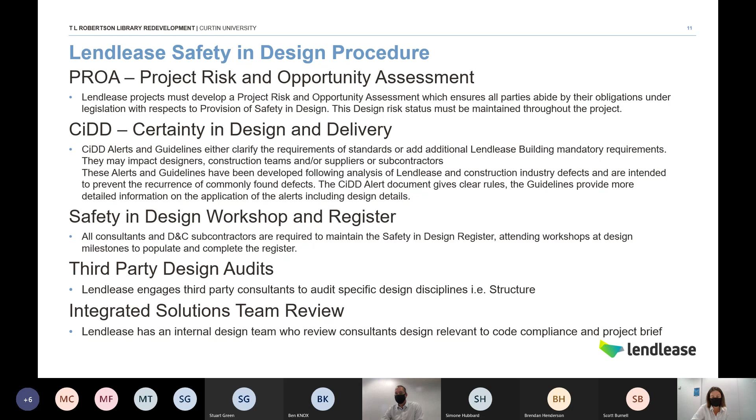So safety in design, going through all of that's obviously what we call our overarching safety in design process, and then there is the specific safety in design register and workshops that we hold.

On this project we did things a little bit differently, and I think that was probably influenced by myself coming from client side and running this on a few different projects. Basically we engaged an external safety in design consultant, called OH&S Solutions out of Sydney. They were engaged to conduct a review of the drawings, a review of the existing register that had been handed over from Curtin when we took over the project, and run a workshop and facilitate a workshop with that information, then populate an additional safety in design register.

I suppose people say that is essentially my role, but why did we engage an external consultant? In my history of working in safety in design, I think it's a shame - a lot of consultants just see it as a box ticking exercise. It's something they're engaged to do, something they're required by code to do.

But it becomes one of those laborious tasks where you probably flick it to the grad in the office, and they're filling out working at heights, making sure services aren't near open spaces, confined spaces, things like that. It becomes very generic and very repetitive from previous projects.

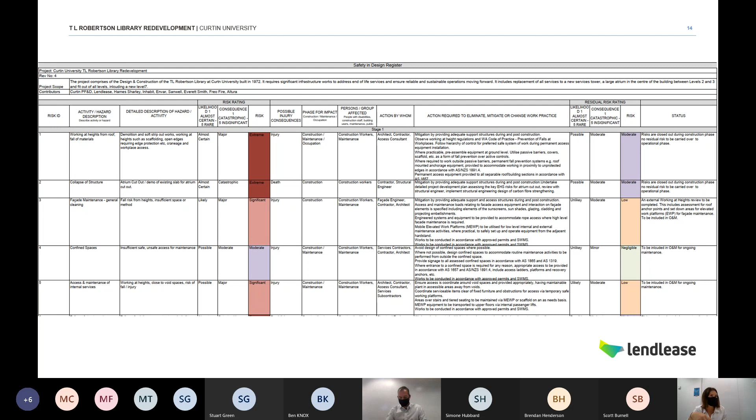So this is just an example of our safety in design register for the project. I'm sure you've all seen these types of registers, basically identifying the consequence and the risk, and how that can be managed out of the design and what the residual risk rating is. We have one of these on our project, continually tracked, and this was developed on the back of that workshop with everyone.

One of the other things I've come across within safety in design is all of this work is done up front with the design team, and that's all well and good, but how does that actually get implemented in the design and on site? I think that's one of the big disconnects in the industry, that the design team do all of this work and the construction team do all of this work, but it's actually implementing them together.

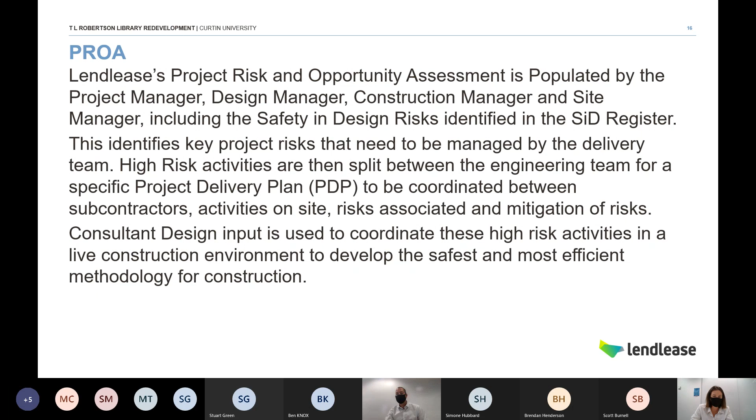One of the things Lendlease carries out is the PROA, which I've talked about, but also that then feeding into the project delivery plan. Our PROA is fed in from all of the key members of site and the team, and that then manages key risks throughout the project. So we'll go through and identify high risk activities within the construction based on the design and the safety in design risks, and then set up an engineer to manage a specific project delivery plan. I'll go through a couple of examples of where we've done this on our project, and hopefully that explains the detail we go into.

One of the big key risks on the project was the stair 5 demolition and reconstruction. In the northwest corner of the building, we're demolishing a section of slab throughout the building and constructing a new fire stair, to meet the new occupancy levels of the building. So a key area for the building, we're demolishing really old slabs, so that's a high risk activity. We're in a live campus environment, with rock breakers, excavators and cranes all operating while we're in a live environment. This is just an example of the breakdown and the level of detail we go into for these key high-risk activities, and the work that needs to be undertaken to ensure it's carried out in a safe manner.

Following the process through, it's identified in the PROA as a key risk item. It's carried through safety in design as how do we design this to be built in the safest way possible. With a fire stair, there's not a whole lot of ongoing operational maintenance, so it doesn't feed in so much to that side, but it's really how we can build it in the safest way possible. This project delivery plan then carries that through into how we actually carry out those works on site. An example of this is the methodology behind how we carry this out, and the additional structural interfaces we need to carry out into the building to then demolish the works.

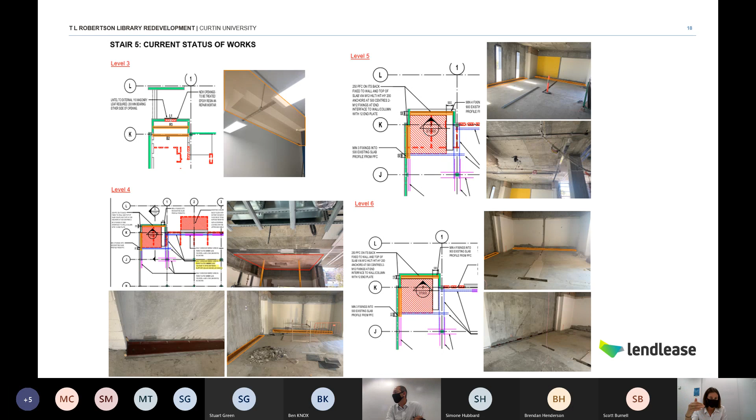And for instance, we haven't actually even started cutting out this slab yet on site because we're still waiting for that design methodology, the top-down sort of propping, structural supports going in, and then as you remove those props, cutting out the slab.

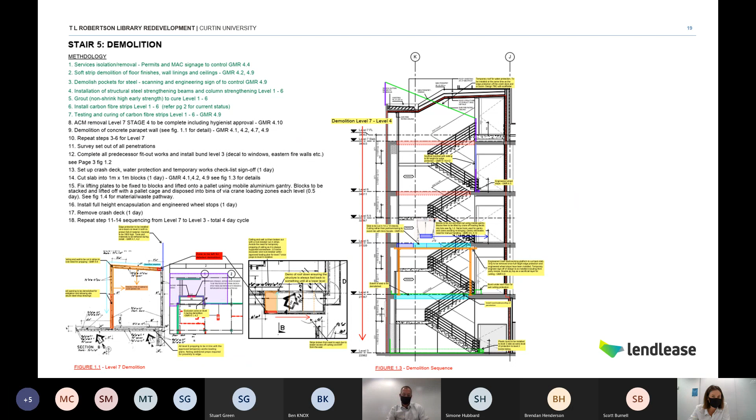So I just wanted to show you the detail that we go into in these areas. This is the methodology of how we carry out the works, and it's got reference to our GMRs, our global mandatory requirements, and how each of those key items feed into the demolition of this staircase.

One of the other major pieces of work on the project is the Atrium Cut Out. This one was a very exciting, and I suppose nervous, opportunity for the team, because we're cutting out a 1970s concrete slab, retaining the central column. So instead of spanning floor to floor, it's now spanning a double height, with additional structural strengthening required to the slab around the cutout and that column.

Again, a breakdown of the PDP below, the steps taken to make that area safe in order for us to then carry out those works. A lot of this highlights hold points - so when do we need to get surveyors in?

When do we need to monitor deflections? So each of this can be handed to the site team so they know exactly who needs to come in and do the checks, and when those checks are ticked off and when it's then safe to carry out the next activity.

So you see here, in step 2, there's a hold point. We've got 3 structural engineers coming out to do pre-demo inspections, confirming that we're now comfortable to start cutting away that slab around strengthening the central column. Then hold point - get all of the engineers out, get the ticks and approvals we require, and then start the demolition. There's a number of steps, and these PDPs break that down and highlight where those key risks are.

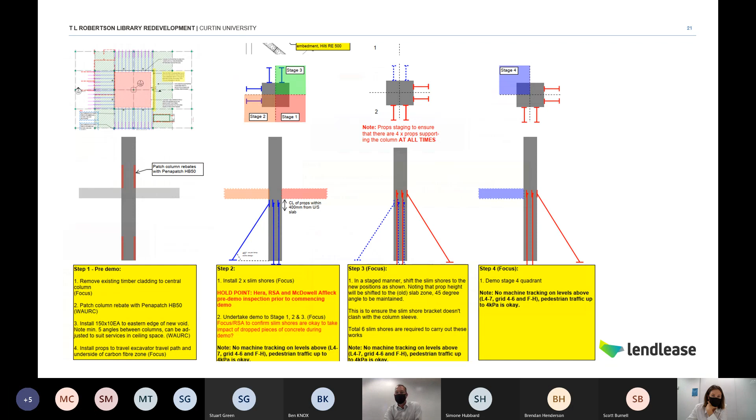Again, just a bit of an example - one of the items that we did here was a lot of carbon fibre. You can see these images here, these bands are all carbon fibre bands, which is basically adding external reinforcement to the slab in order to prevent any deflection around this area when we do start cutting out the floor slab.

Hold points, again, to ensure inspections happen, that we do pull tests, things like that, to ensure that the carbon fibre is adhering to the slab as it should, and then making it safe to start the work. Again, another really interesting exercise, because we're driving excavators and rock breakers on a 50-year-old slab.

So these PDPs pick up key structural requirements around that sort of work - how do we ensure that there's enough back propping for the excavator to drive over the slab that we're breaking, and is it safer to break it and let it fall down, or break it and take it away from above.

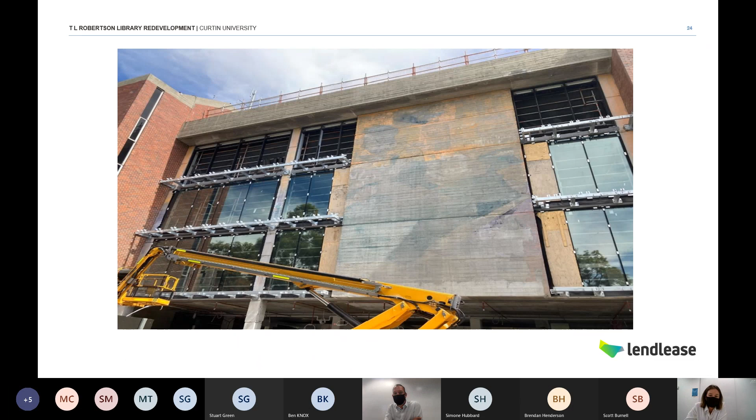Facade demolition - again, one of the key activities, we basically broke out the existing concrete facade on the north and south of the building. This one was actually one of our very high level activities that went right through our business, right up to the tippy top of delivery in Lendlease. One reason is that we were breaking out facade here on level 6 of the building, and how we then managed the fall of that material while people are carrying out works, in a live campus environment.

So this went right through a very detailed review, and Curtin, as the client, were also involved in those reviews about how we carry out those works safely.

So it involved, I suppose, this image here shows it quite well. We've got the back propping here because this is the large box beam above. We've then got the EWP, which the gentleman carrying out the rock breaking is on. This is tethered back so that even though we have wheel stops here, there's 2 points of restraint. And then ensuring that this netting was installed so that all of the material falling outwards doesn't go further than it needs to, because you're dropping it 4 or 5 levels.

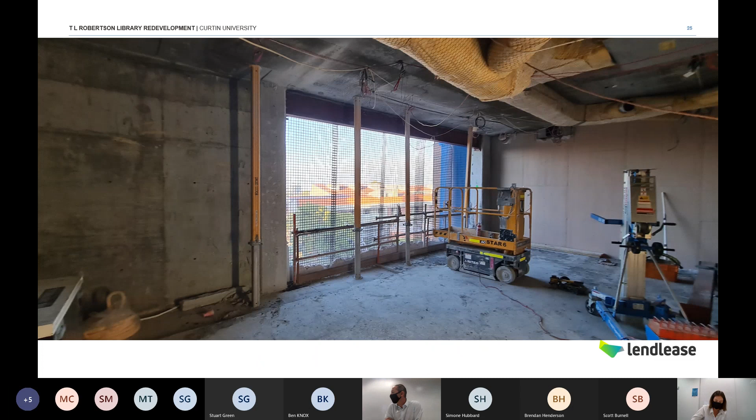So the business was quite nervous about the works carrying out, and so it goes through this project delivery plan that is developed, and goes through a number of reviews. Just some photos showing the works being undertaken - we actually carried out these works at night time too, to avoid any interface as much as possible with students, and the noise.

Here's one of my favourite PDP plans. We've got the little Lego construction men showing you what we're doing, detailing how we undertook this work, and the key steps and hold points that needed to be carried out. That goes right into how we're managing fume extraction from the excavator, right through to where the rubble is going to fall and how that's removed from the project.

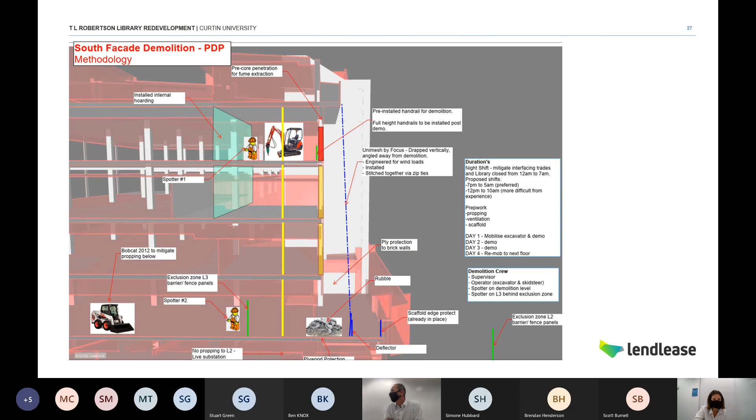Services tower - this is our new area of construction, which I showed you those images earlier. We've got a number of different slab formations in this area, and that was around keeping program, maintaining program.

Hollow core - not sure how many people are familiar with it - is also known as delta core. It's got big hollow tubes right through those planks. Those planks are prefabricated off site, lifted into site, and then a topping slab is poured over the top. So they're a lot more lightweight than your traditional concrete slab. I think we brought in one whole level in a day - comes in on the back of a truck, lifted into place, and your slab's basically assembled in a day. So it saves a lot of time and is a lot lighter.

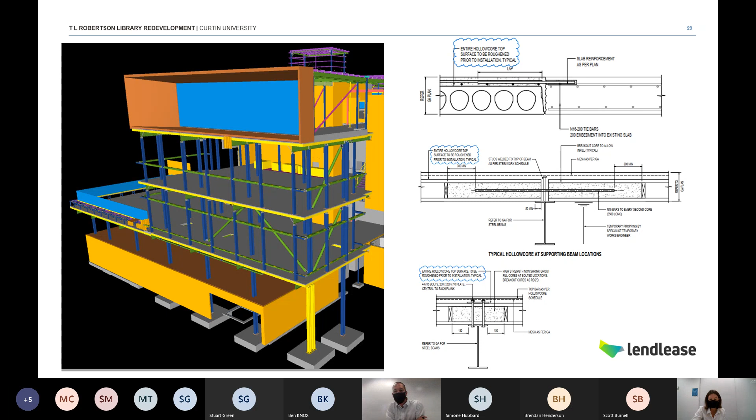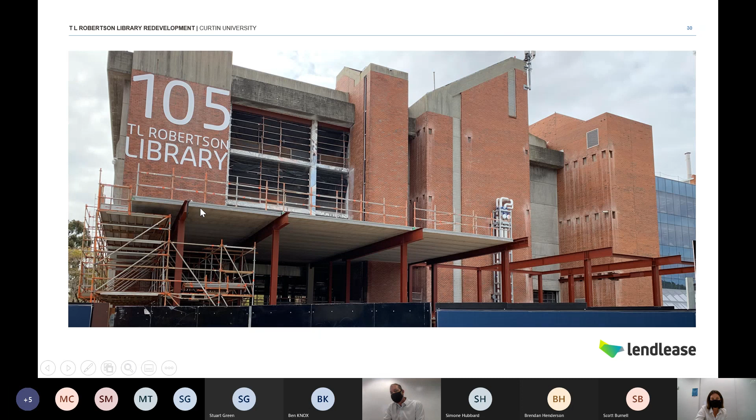Again, just the photo there of it all going in - you can see these are our hollow core planks being lifted into place. I think we assembled this whole floor slab in a day or two days. Just some photos of the planks going in.

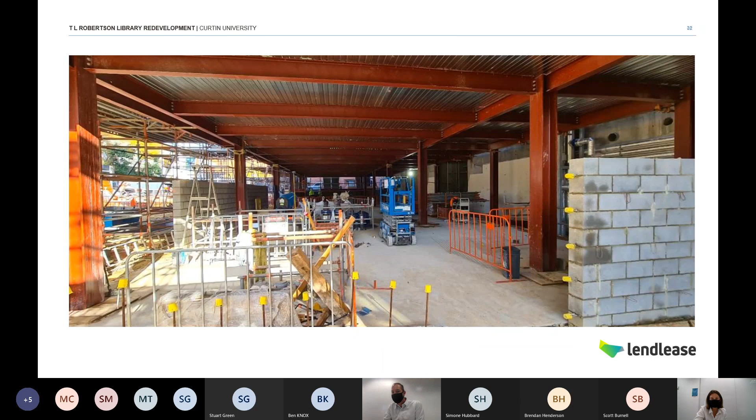And then this is our Bondex slab underneath - this is where we're now able to work underneath because we've got that safe crash deck on top. And some more examples of sites - this is our level 3 slab, so this is the Bondex slab here and the hollow core planks you can see above.

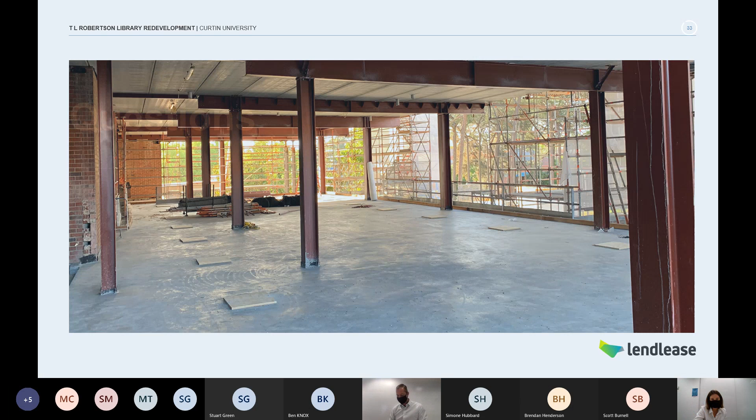Are there any questions? I probably spoke quite quickly there.

No, that's great. Thanks for that, Abby. I have one question, and that's really around, from a client safety professional perspective, what is the value that we can provide into the safety and design process? What's the value that, from a client perspective, you feel is the most valuable? Yeah, I think 2 areas, and I touched on these a little bit.

Ensuring that your O&M team pay attention at the beginning. I think what I've found in many construction projects I've worked on is people struggle to see a tangible completion when you're in that early design phase. So your design team sort of parts from the client and goes on this pathway to design the project, and then all of a sudden, comes end of detailed design into IFC documentation, we're then trying to pull it back to work with how O&M are going to actually maintain that building.

I think one of the first initial concept meetings should be with the O&M team - how do you manage buildings on site, specifically in a campus environment where you know how you manage buildings? It's not just a one-off.

I think probably issues that we've come across on both of the Curtin projects that Lendlease has worked on here is that Curtin don't love rope access, but in today's day and age, rope access is what most buildings are designed to meet. So that design path has gone down this way - rope access - and then the O&M team get involved, and we don't love that.